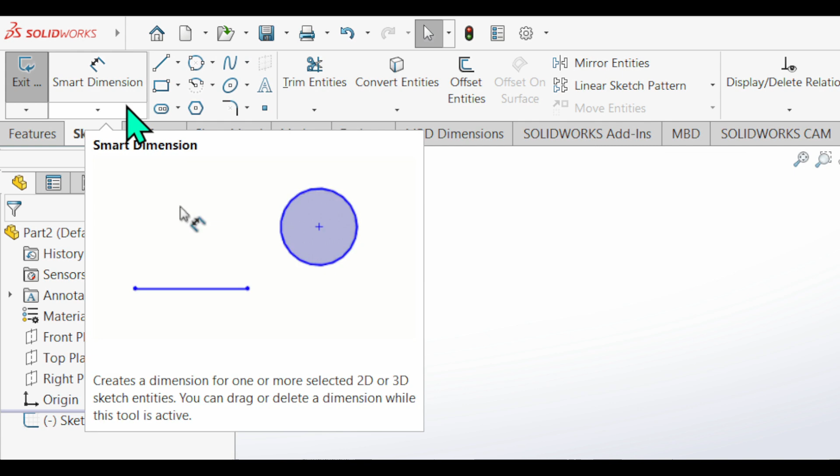We make a circle of R62 radius at the center. To make a circle, I can go to this sketch tab and here I will get different sketching entities. Simply click over this dropdown and select circle. After selecting circle, I can click over this origin and click it like this.

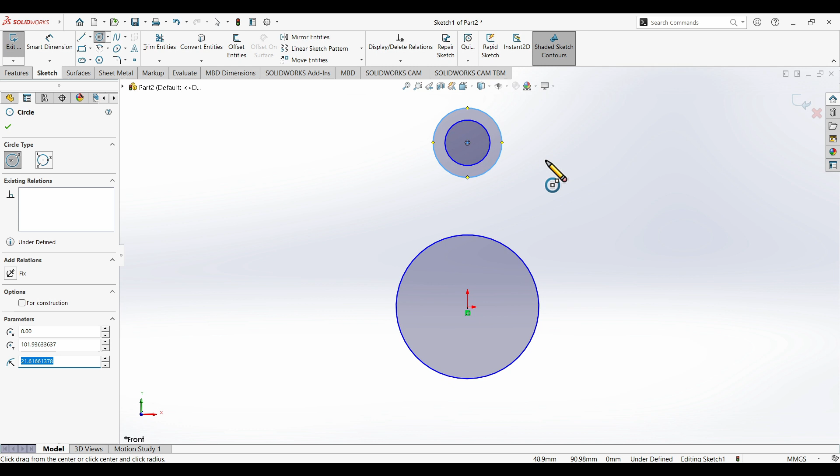After this, if I need to make another circle, I can do it immediately because the circle command is activated, so I can make circles like this. Once I complete making circles, I don't need the circle command activated anymore. So here you can click OK and close dialog. Once you click that, the next thing you have to do is go to Smart Dimension tool.

Click over Smart Dimension tool. By clicking over Smart Dimension tool, you enable applying dimensions to different sketch entities. Here I clicked on this circle and I need to apply R62, that means 62 into 2, this is the diametrical value we have to enter.

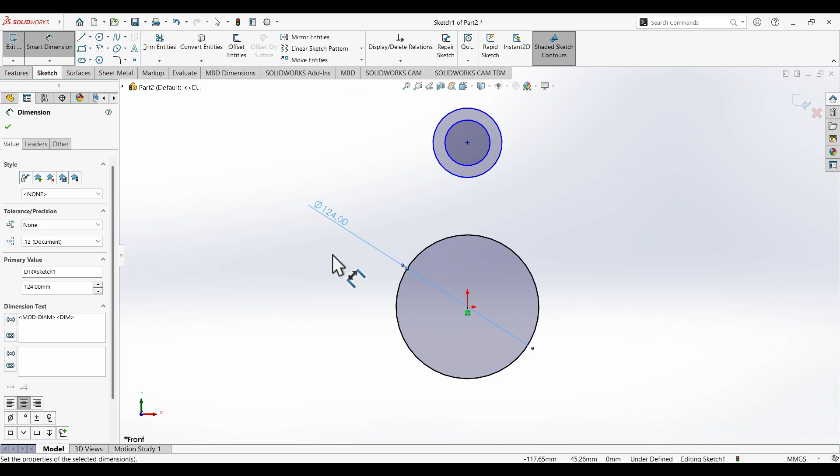Simply press enter. After that, the height from here to here I am getting is, let's check it up, 110. So let's apply it here. Double click, 110, enter. After that, again I am getting two different diameters, 26 and 48.

R24, it is 48 diameter. So let's draw 26 and 48 circles there. So this is 26 and this is 48.

Even after creating these diameters, these circles are appearing blue in color. Why? Because they need to be aligned with the origin. As they are not horizontal with the origin, it is appearing blue. To apply that, I need to select the center point here, press control, select the origin again.

After that, what next? I have to create these arcs here of R45. To do that, I can again go back to circle, but this time I won't be taking this circle because I have to make a circle which will maintain tangency with two different entities. You have to click beside this dropdown icon, and here we can see there is an option called perimeter circle, which works like a tangent radius.

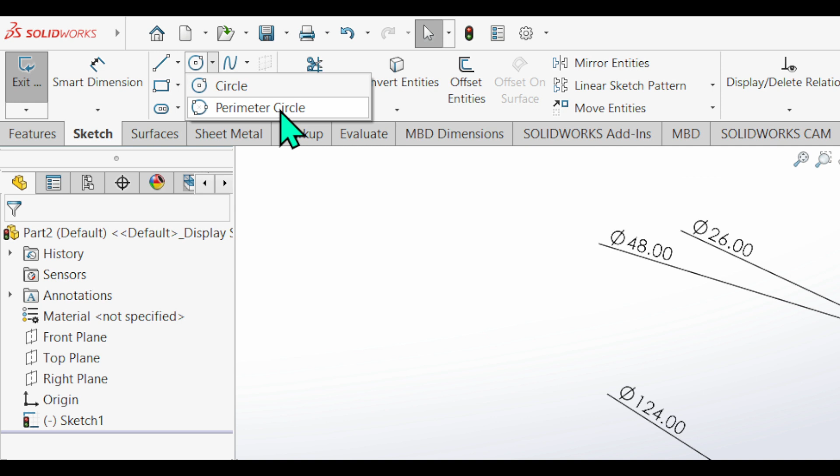So here you will select this. After selecting it, you go to the sketch, select this particular entity, this entity, and click here. Press OK. The same thing again I need on that side. So again I will go here, click over here, here, and click here.

After creating these two circles, I know that these two are of same radius value. So first we apply equal constraint. To apply equal constraint, select them by using control key, and here I can apply equal.

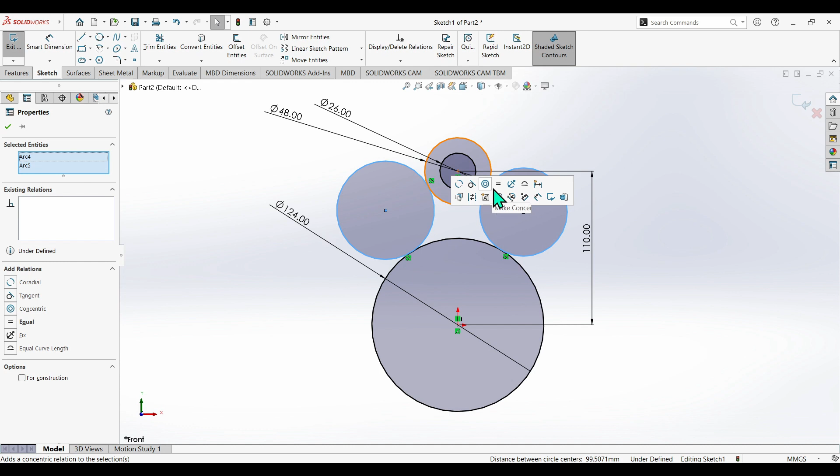After that, go to smart dimension and apply the dimension to any one of them, or else we can simply trim out first and after that apply the radius value. So this radius value is given 45, enter.

Very easy. Next thing I have to do here is right below from the center to this point, I have to go 130 mm height, and there I will create an arc slot. So to do that, again I will go to the software.

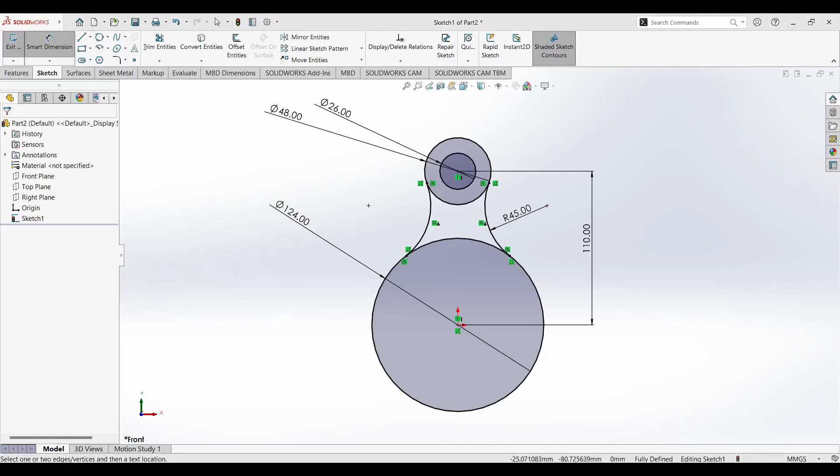Here in the sketch tools, I get different types of arcs to create. So the type of arc I need here is center point slot, center point arc slot. To make this we first need to select it. After that, you simply click over the center point, and this will be the start point, and this will be the ending point, and like this I can create this smaller arc.

After creating the arc, I have to define the dimensions. The first dimension here is from here to here, you need to provide 130 mm height. So go to smart dimension tool, click here and here, and this height is 130.

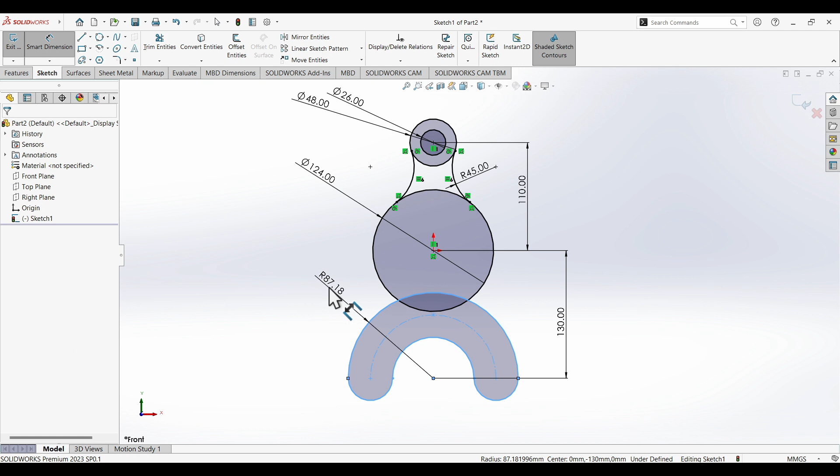After that you need to apply 64 radius and 20 radius here. So again I'll go to here, 64 radius, and this is 20 radius. I have to apply it like this.

After that, here you can see R22. So let's apply that as well. Click here and apply R22.

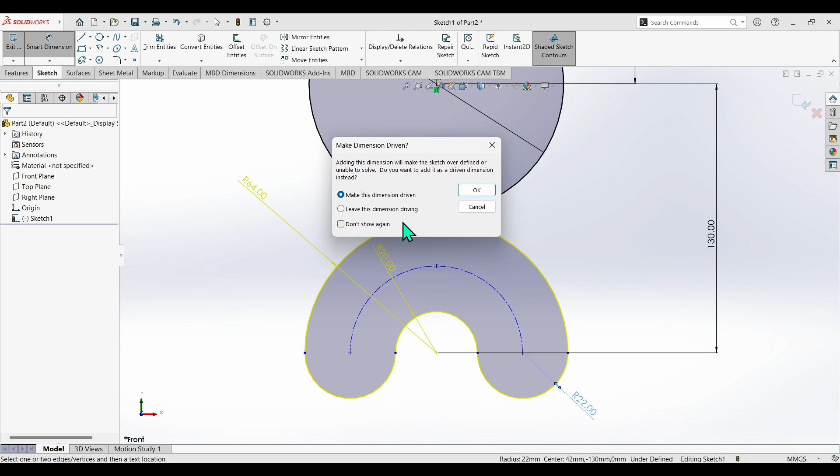So see, it is showing me an error. It is the driven dimension. That means after giving these two dimensions, I cannot give it. Okay, that's totally fine. So let's see what else we can give here.

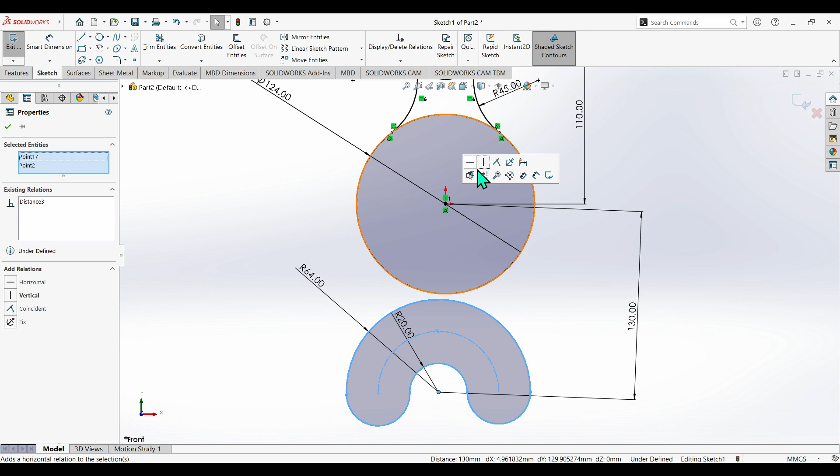As this is moving here, we have to make it vertical with the center point first. So select this particular center point, and also select the origin point. After that click on make vertical.

After that, when I drag this here, I notice it should remain in alignment with this point, but it is coming forward. So I have to fix that as well.

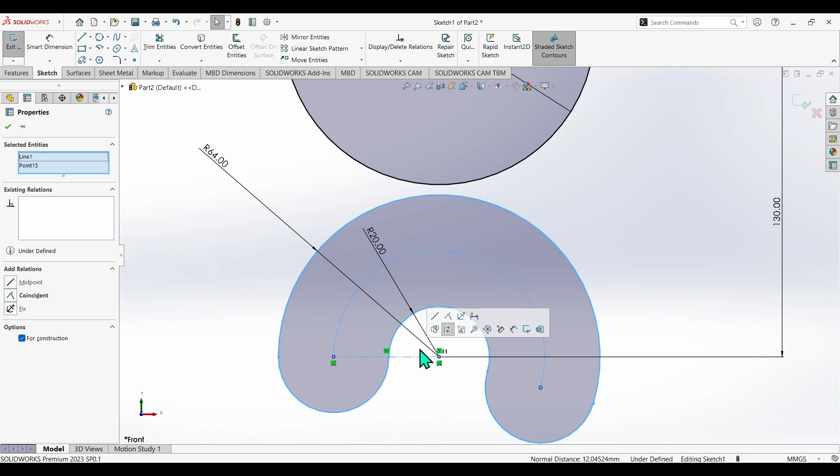So take a center line here from this point to this point, select this center line and make it horizontal. With the same center line, I can coincide this point as well. Select that point, press Ctrl, select the center line, and make it coincide. So like this, I have made this sketch fully defined.

After that, what next? The next part here is to create this R40. So it is very easy.

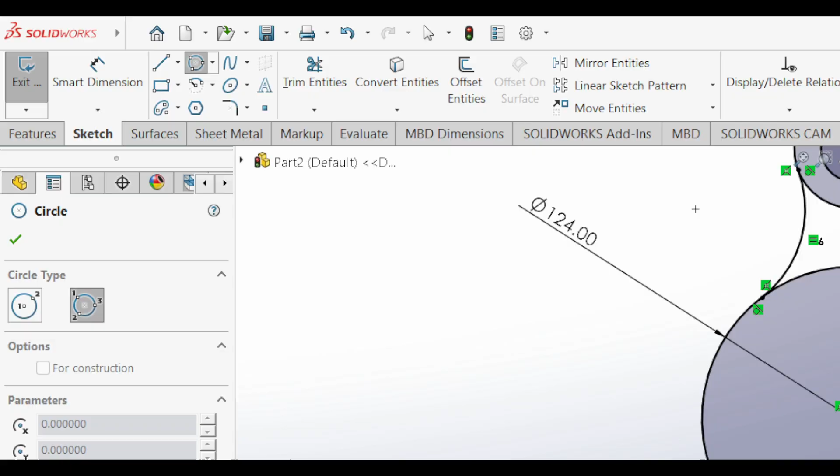Again we will go to perimeter circle. So here we have that option, perimeter circle, click over it. After that you have to define first entity, second entity, click here.

Okay, the same thing I need in the opposite side. Again go here, click here, click here and click here. After that go to trim entities and trim both of these like this.

And I know them equal in radius, so select one entity, press Ctrl, select the other entity and make them equal. After applying equal constraint, I will go to smart dimension tool and apply the radius value, that is 40.

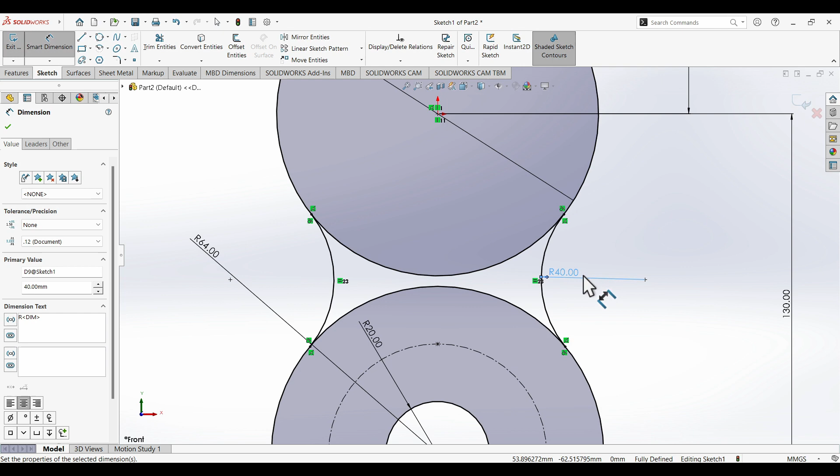Right, so after creating these sides I will use trim tool here. Here we can see trim entities is an option, click over here and simply trim out the unnecessary portions. This is how I trimmed out the slot.

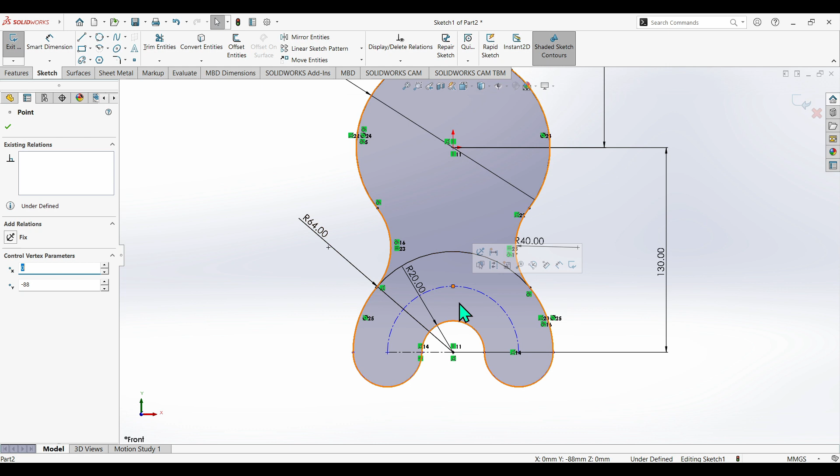Okay, now I don't need the center point of the slot, so I selected it and deleted it. After that, I lost some relations after trimming, so I need to re-establish them. So simply click over them by using control key and apply them.

Like here, I applied tangent again. Select this, press control, select this, apply tangent, and like this it is again turned to black. That means it is fully defined.

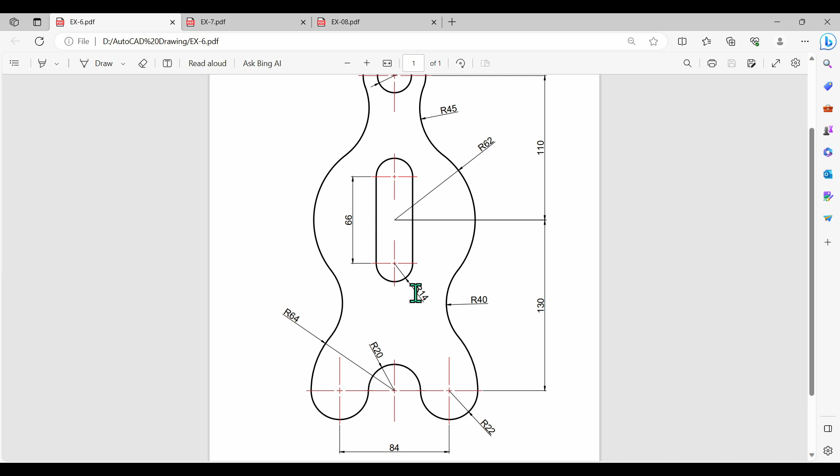After that the last thing remained in the sketch is this central slot, and it is a straight slot of 66 length and radius 14. Let's do that.

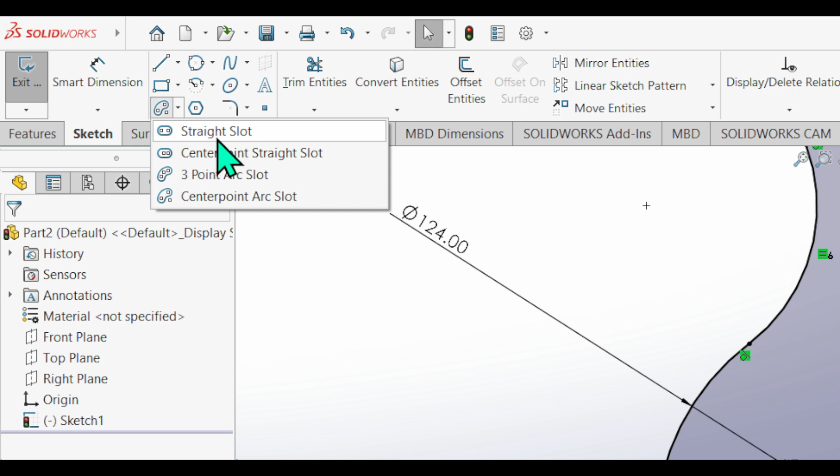So to get that straight slot option, I will go here in the sketch, click over this drop down. Here I have two different options, straight slot, center point straight slot. So center point straight slot will make my work easier. Simply click over it.

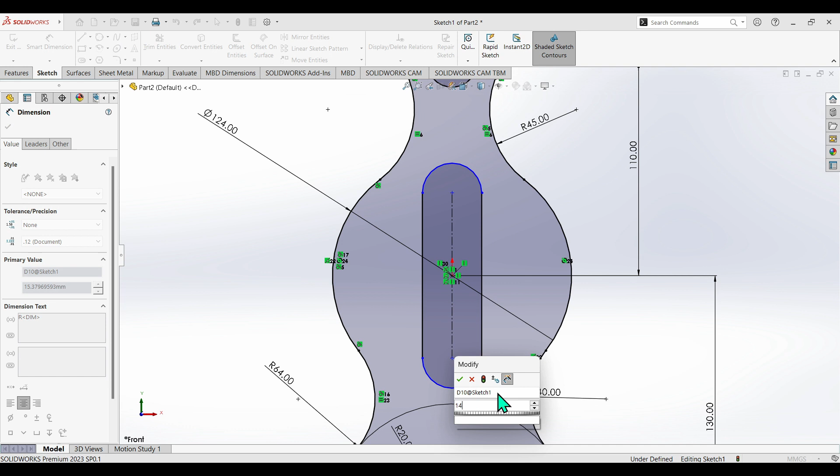After that this will become my center point and this way I can create a straight slot. Now this radius is 14, enter, and this height is given 66.

As we can see here, our sketch is complete. So there is nothing which needs to be done anymore. It is already completed and this was a very simple and very interesting profile.